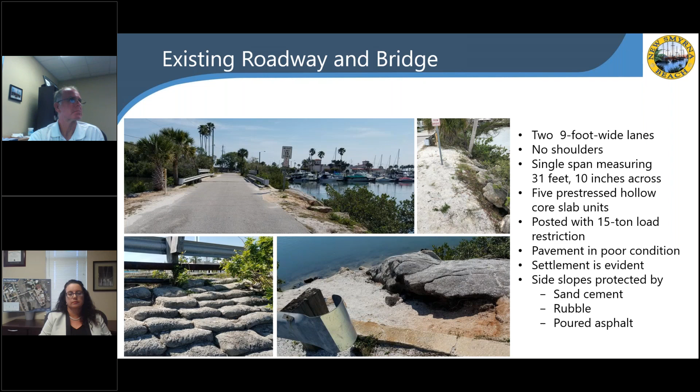The existing bridge and roadway approaches are in poor condition with deteriorating slope protection at each bridge approach. The existing bridge structure carries several utilities, including water, sewer, and gas lines. In addition, overhead electric and cable are located next to the north side of the bridge.

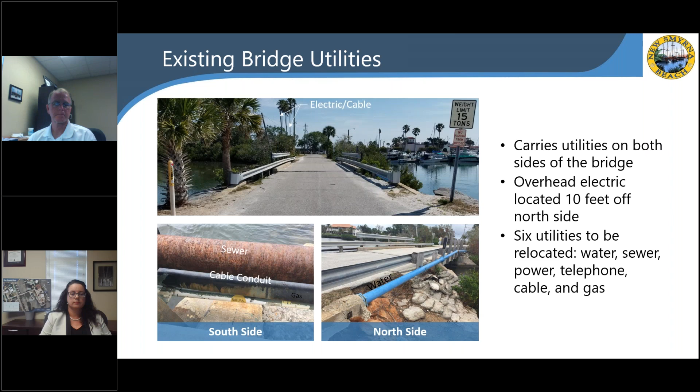In 2018, the City of New Smyrna Beach launched a project to design a replacement bridge. The original design would have provided a single 35-foot-long bridge with one travel lane in each direction and a sidewalk. This design was presented to the community at a public meeting on November 1, 2018. Based on the community's feedback and desire to widen Yacht Club Cut to improve flow in the channel, the city decided to pursue design of a longer bridge. The necessary expanded environmental review for a longer span began in September 2019.

The new proposed design provides two 9-foot wide travel lanes and 2-foot wide shoulders on the approaches on each side of the bridge. The proposed bridge would provide two 9-foot wide travel lanes, 2.5-foot wide shoulders, and a sidewalk on the north side of the bridge. As shown in this view, the new proposed design calls for a 3-span bridge measuring about 160 feet across. This design would remove several feet of the existing embankment and reconstruct the slopes with rubble riprap.

The environmental review included identification of the protected species that could be impacted, such as manatees, sea turtles, and small-toothed sawfish. The review also determined steps that would be needed to avoid, minimize, or mitigate any environmental impacts. The results of the evaluation determined numerous environmental commitments, including a mangrove mitigation plan, relocation of oyster beds, developing an essential fish habitat mitigation plan, taking measures to protect sea turtles, sawfish, and manatees during construction, and installing grates on the drainage culverts to keep manatees from entering the pipes.

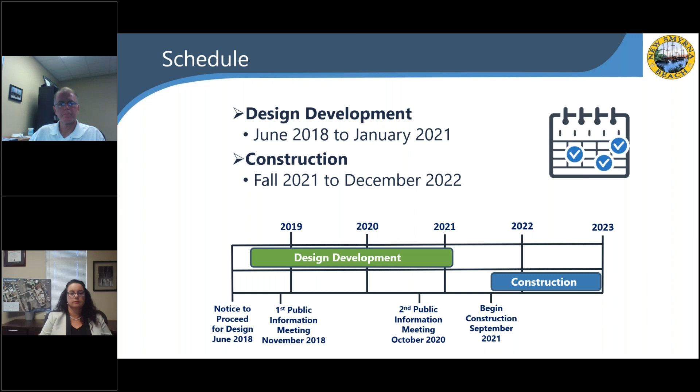We invite your comments and questions through any of the following means. You may type your question or comment into the question box during this virtual meeting. You may download a comment form from the handout section and send it back to the address shown on the form. Or you may send your comments to Amanda Woods, project consultant, by email at awoods@drmp.com or to New Smyrna Beach City Engineer Kyle Fegley at kfegley@cityofnsb.com. All comments and questions submitted by October 25th will become part of the record for this meeting and will receive a written response.

We will now open the floor to questions and comments. If you'd like to ask a question, please type your question in the question pane. If you are calling in by telephone or are unable to enter a question in the question pane, we ask that you please contact Amanda Woods by phone at 407-896-0594 or Kyle Fegley at 386-410-2811 to provide your comment after this meeting. As a reminder, we will reply to all questions and comments in writing after the meeting.

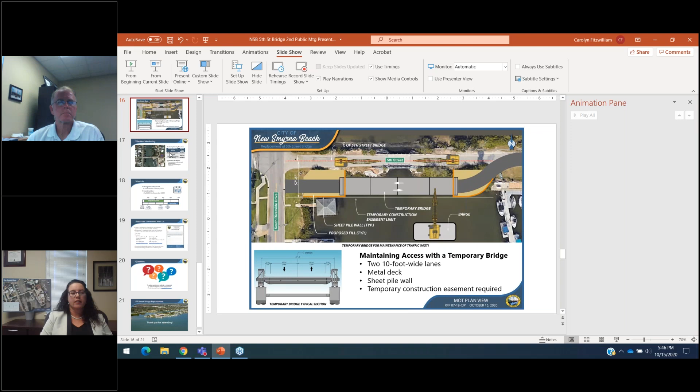So George and Amanda, the first question that we have is, what are the dimensions of the span supports? Sure, Carolyn, if you could go back to slide 9. So the bridge is going to be a 3-span bridge. The total length will be approximately 160 feet. There are going to be 3 spans, which are 53 foot, 4 inches apiece. If you go to the next slide, Carolyn. There you go. So at the very bottom, you can see that it's a 3-span bridge, and in between each of those pile bents is going to be between 53 and 54 feet. Thanks very much. Sure.

We also have a question about whether or not fishing would be allowed from the bridge. No, right now fishing is not allowed from the bridge. There are signs posted at each end of the bridge that say no fishing allowed. The new bridge will have a sidewalk on the north side. However, we will be posting those signs again on each side of the bridge saying no fishing will be allowed. Thank you. Again, if you do have a question, we ask that you please enter those questions in the question pane for us.

Another question we've received was, what will be the weight limit of the new bridge? So the weight limit will be per Florida code. Right now, the existing bridge has a posting of 15 tons. The new bridge will be able to carry a semi, delivery trucks. There will be no posting at all. So as far as specific tons, it will be as if it's a regular highway bridge going down the turnpike, I-4, I-95.

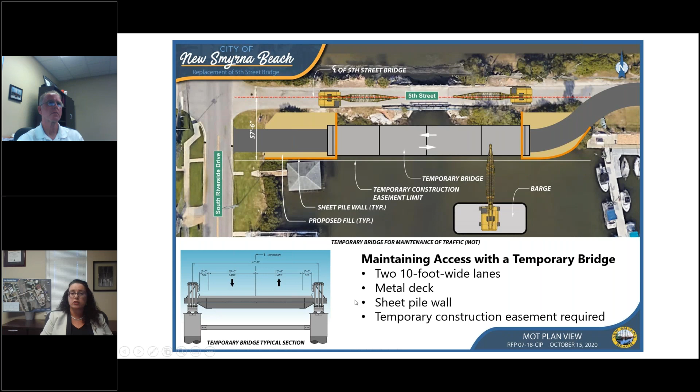What they'll do is prior to any construction commencing, the houses and also the docks that we've identified, which was in a different slide that we had, the contractor will be required to go out and survey those. Then after construction is finished, he will survey them again to make sure that there's no settlement, no cracks, no issues with those structures.

And we had a question about whether we have an idea of how much rocks and dirt and other things will be removed. Yeah, so if you go to, I believe, slide 9, there you go. You can see that this is considerably longer than the existing bridge out there. So we are removing all of that middle portion and creating that open waterway. That middle span where the arrows are is approximately 53 feet. The existing bridge that's out there right now would fit in that span. So if that gives you a sense of how much we're removing, it's quite a lot.

And we had a follow-up question about the lighting, asking why lighting is not on the bridge itself. Because we did the photometrics for the bridge, and we could actually light the bridge completely from the end spans, which is more practical. So as long as we meet the FDOT lighting criteria, it doesn't matter if the lights are on the bridge or off the bridge. And we were able to do that by keeping the lights off of the bridge.

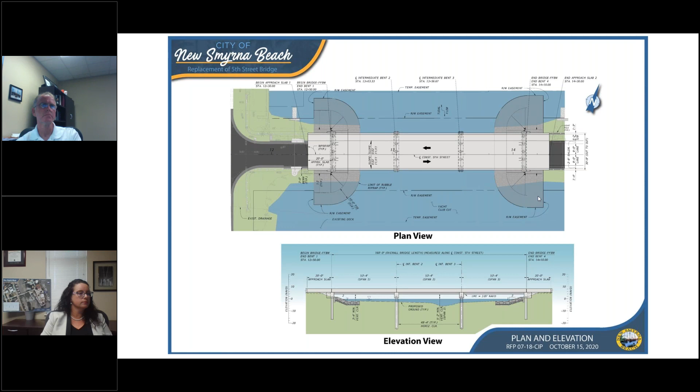Okay. I think I addressed all of them. If I did not, I apologize. We will be responding to all of the questions again in writing after the meeting. We really do appreciate everybody's interest. I want to put up Kyle and Amanda's contact information again.

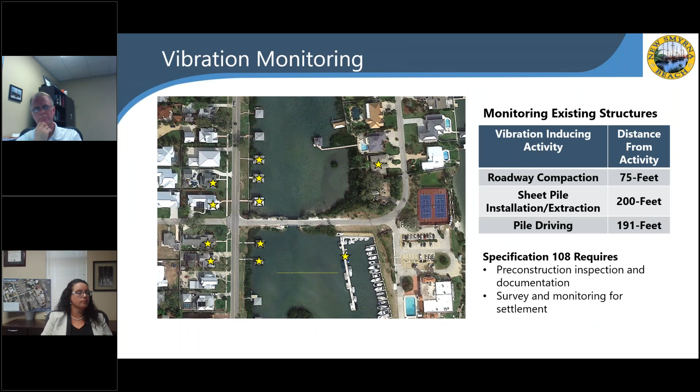Yeah, and I just want to address one I see that came up about the tractor trailers. The new bridge will be able to handle, say, a tractor trailer coming over. For instance, if you're moving in and out of that neighborhood over there and needed to have a moving van, a large one, the new bridge will be able to accommodate that going across the bridge. So I hope that answers your question. Not that we're encouraging semi trucks to go across frequently, but certainly the new bridge can handle that.

And the bridge will be constructed for a service life of 75 years. Thanks for catching that one, Amanda. We've gotten lots of great questions, which is a good thing. So we do appreciate everybody taking time to join our virtual project update meeting.

Again, we will be placing a recording of this presentation and providing the city with all of the exhibit boards that are in your handout section. I do encourage you to take a moment to download those to your computer. The plan view that we were looking at earlier, as well as the MOT plan and some other boards are there. So we encourage you to download those, and they will be available from the city or from Amanda or Kyle after this meeting if you would like a copy.